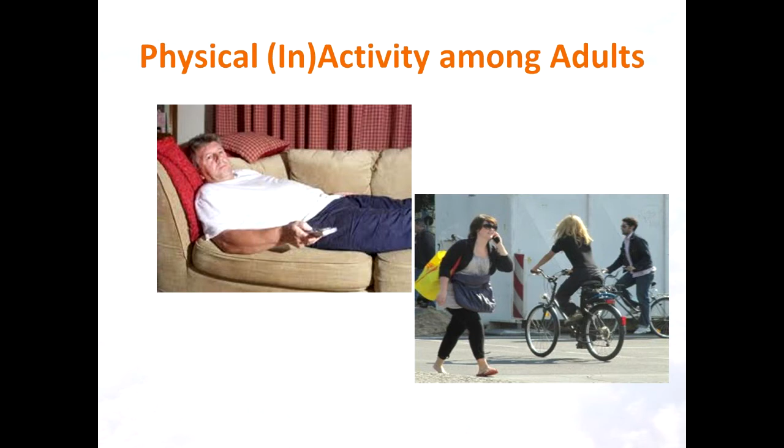We know that being physically active has many health benefits: it prevents obesity and other chronic diseases, relieves stress, and has a positive impact on mood. But we also know that sitting or lying around too much is dangerous to our health. Research shows that even when adults do reach the minimum level of physical activity each day, if they also sit around too much, they are still at risk for obesity and other health problems. In other words, it's not enough just to be active enough—you cannot cancel out the dangers of sedentary behavior just by walking or biking enough. In the public health world, more attention is being paid to the dangers of being sedentary as well as the importance of increasing physical activity among the population.

Sadly, driving is one of the all too common, and quite difficult to avoid, forms of sedentary behavior. This study looked at how the more miles a person drives, the more likely they are to be obese. In the lowest quartile of miles driven, only 9.5% were obese. In the highest quartile, 27.08% were likely to be obese.

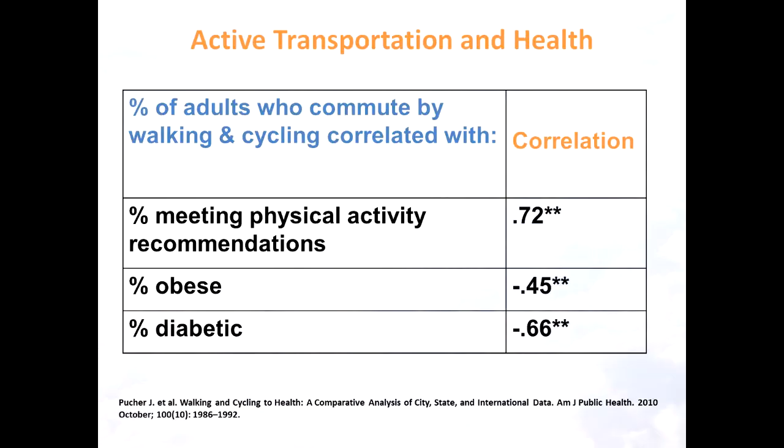This study compared all 50 states in the U.S. and found that higher rates of walking and cycling to work were associated with a higher percentage of adults who achieved the recommended levels of physical activity, a lower percentage of adults with obesity, and also a lower percentage of adults with diabetes. The data you see here is an average of the correlations found for all 50 states. You can go ahead and skip this one.

So for children and youth, same with adults, not enough kids across the nation are being active enough. Also, there's a very high level of kids just being sedentary, watching too much television, spending too much time playing video games. We will be having a research review coming out from our program, hopefully within the next week or so, looking at sedentary behavior among youth and the dangers of that and different ways that we can lower sedentary time.

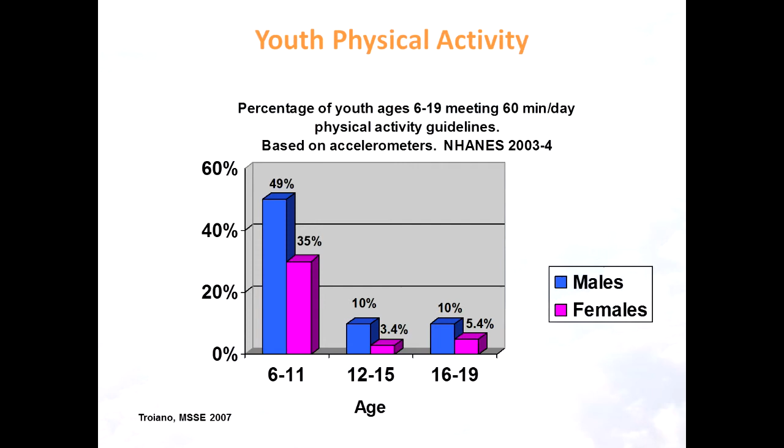This shows that across the country, the percentage of youth who are meeting the 60 minutes a day of recommended physical activity is quite low. It's the lowest in the middle age group of 12 to 15-year-olds. And we know that as children get older and reach adulthood, their physical activity levels continue to decline. So it's a challenge that just continues to be more of a challenge as people get older, that they are not getting enough physical activity.

This is all evidence-based. We know being active is good for body and mind. There's the physical benefits, there's mental and cognitive benefits. And one of the things that we here at ALR, Active Living Research, focus a lot on is the message that being physically active among children is good for their academic performance.

We know that in schools, it's much less likely now that kids are able to walk or bike to school. The rates of walking and biking to school have dramatically declined since the 1970s, and that's due to a number of reasons, whether it's fear of strangers, fear of other dangers that may or may not be based in reality. There's also just the physical environment that has changed. But the opportunities to make the environments better, to make them more walkable and bikeable for kids are there.

There's also opportunities in the school for better PE, more time for recess. And the argument that we like to make is that being active and being fit has been demonstrated in many studies to be very good for mental focus, for cognition, for school behavior, for school performance.

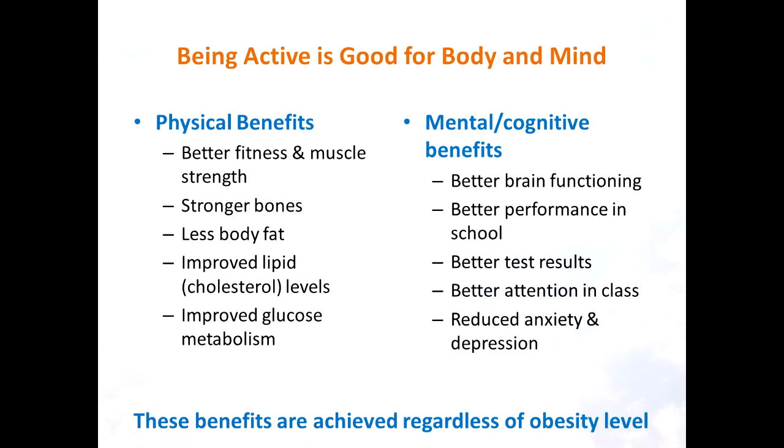Here we see that in a Danish study, adolescents who walked or biked to school were less likely to be overweight than those who drove to school or who were driven to school.

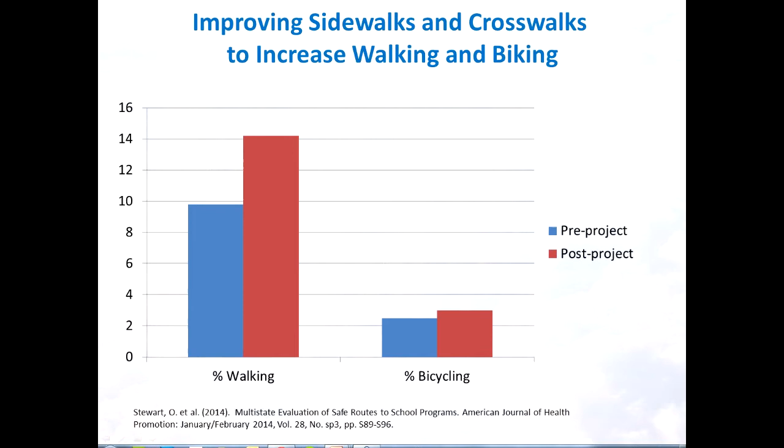This is a newly published study in the current issue of the American Journal of Health Promotion. It evaluated the impacts of safe routes to school projects in 5 states: Florida, Mississippi, Texas, Washington, and Wisconsin. And it found that walking and biking to school increased by 37% when sidewalks and crosswalks were improved. The importance of this study is that it's the first large-scale study to show that physical improvements to pedestrian environments, rather than just programs or educational campaigns to encourage walking, can actually result in higher levels of walking.

And those changes have worked. I think the rate of cycling went up 262%, the annual bicycle counts between 2000 and 2010 went up by 262%. So dramatic changes happening in New York City, and a lot of this has been led by the efforts of an agency called the Center for Active Design. You can check them out. There's a new nonprofit called the Center for Active Design that is consolidating the work and continuing the work that the City of New York has done to improve their environments for pedestrians and bikes.

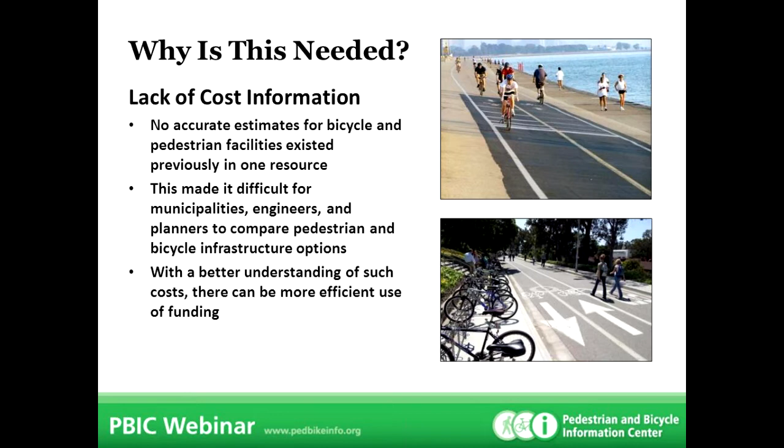Finally, we figured this resource is valuable in that when agencies are considering adding pedestrian bike facilities, they need this piece of information on the cost to combine with expected effectiveness or benefits of the improvements, and the benefit cost ratios for estimating purposes and allocating resources.

So where do these costs come from? Well, our team set out and really looked in a variety of places. One of the most useful sources, of course, was the internet, going to different state DOT websites.

We didn't just believe anything that was on the internet, because you can get a lot of misinformation. But we did go directly to primarily state DOT websites, where they would publish the costs they were experiencing for different treatment types. We were able to get information from about 40 states.

There was also another resource called Bid Express, a transportation bidding website, and we were able to interact with the folks that run that website, and they gave us written permission to use certain information from the website as it pertained to pedestrian bike treatments.

And then we also targeted certain searches of publications and reports from recognized journals or other sources that might be useful as well. So for each of the different costs, we would capture information like the type of facility, the description, what kind of road it was on or what kind of conditions, the total cost and the unit cost, for example, cost per square foot or cost per treatment, the sample size, how many of these treatments were installed.

If it was 100 miles of road, that would certainly have generally a lower cost per mile than if it were just 1 or 2 miles. So the number of treatments, it was 50 different pedestrian signals. The cost per signal was generally less than if it were only 3 or 4 that were installed. So we did capture the sample size used to generate the cost.

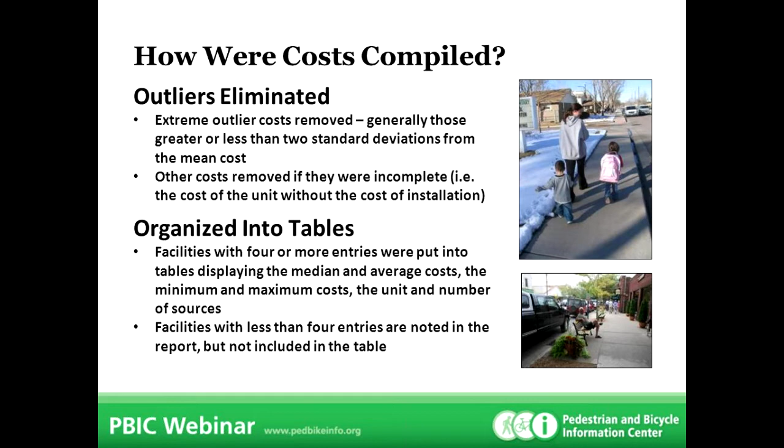We also eliminated costs if they were incomplete - for example, they did not include all of the different elements involved. And then we took the costs after we did sort of a filtering and screening, as I described, and put them into a series of tables. We're going to go through some of these tables and talk about the different information contained there.

And finally, just to let you know that what we're going to present in the report itself, it's represented by about 1,700 total cost estimates that we recorded, relating to about 73 different types of pedestrian bike facilities or infrastructure, and these are summarized in tables. And again, they came from 40 different state DOT websites. 5 of those 40 states, by the way, had more than 100 entries each: Ohio, California, Minnesota, Massachusetts, Wisconsin.

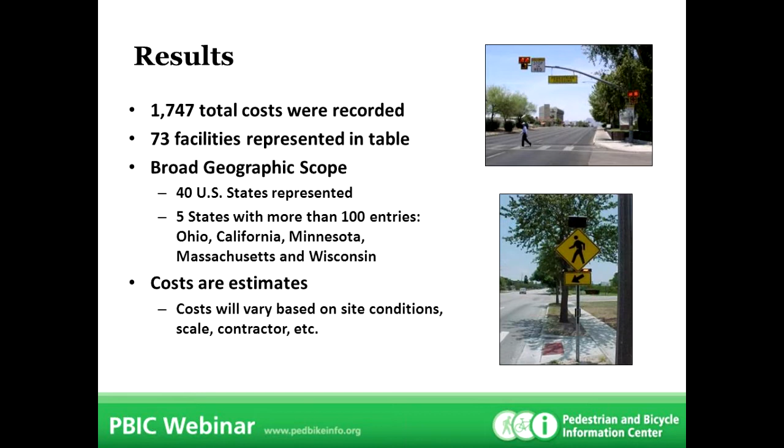And the costs for a given treatment do vary considerably by site conditions, by the number of treatments, by the contractor, by the labor cost, materials costs, all kinds of other factors that we realize there are some normal variations. Okay, next slide.

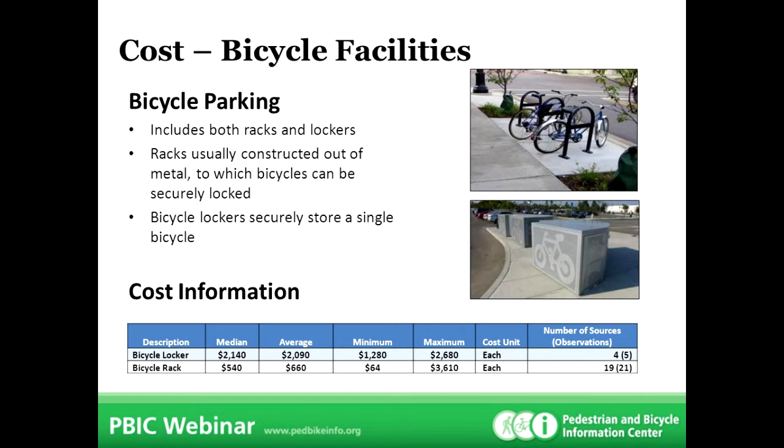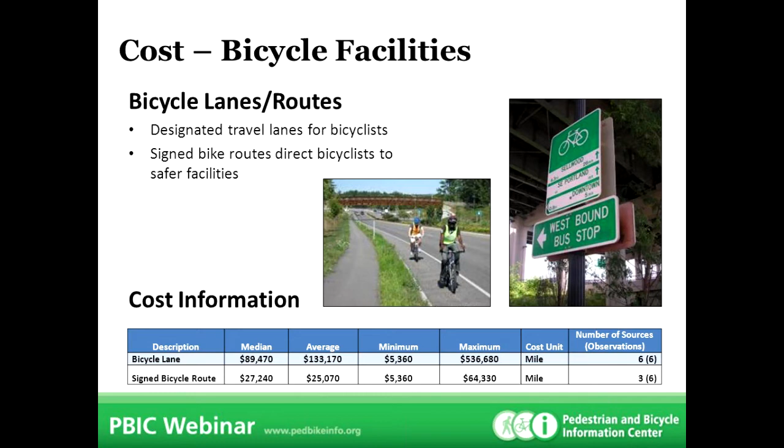For the next bicycle facility, we found the cost for bike lanes or signed routes. Bicycle lanes, shown in the picture on the left, are typically assumed to be 5 feet in width, and the cost unit was by mile. The average cost for a bike lane is around $133,000. Signed bike routes, shown on the right, help direct bicyclists to safer facilities, and the average cost for that per mile is around $25,000.

Next we have some traffic calming measures you can install. The first is a chicane, which is a concrete island that helps offset traffic and slows vehicle speed by creating a horizontal diversion. These can either be made out of concrete or landscaped, as shown in the pictures. The cost for these was around $10,000 on average.

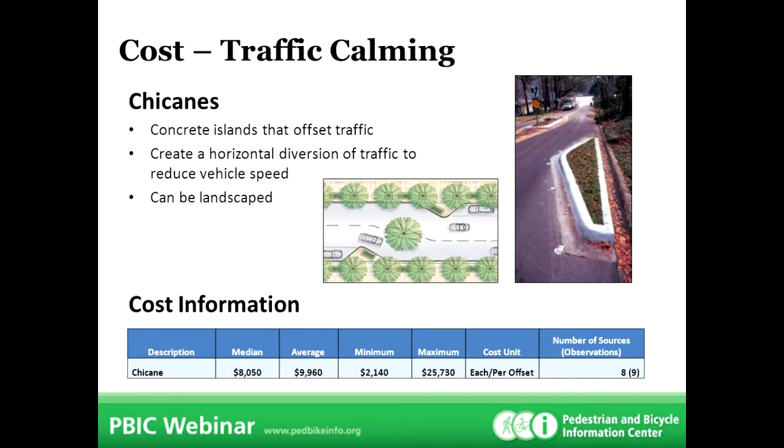Another traffic calming measure is curb extensions, also known as chokers or bulb outs. These extend the sidewalk or curb line out into a parking lane, creating a pinch point in the road that helps pedestrians cross the street. They can be done by bringing both curbs in, as shown above, or by dramatically widening one side at a location. These can also be used at intersections to create a gateway effect. The cost for these was around $13,000 per curb extension.

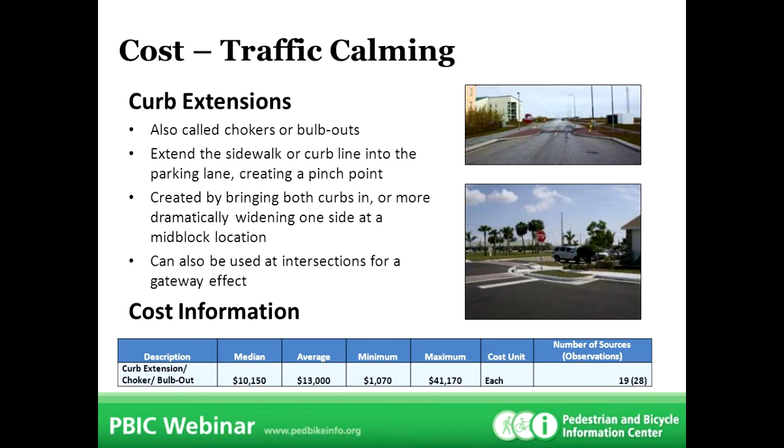Next we found the cost for diverters. These are islands at an intersection that help prevent certain through or turning movements by cars. They can be placed across both lanes of traffic, known as a full diverter, or just across one lane as a semi-diverter. You can see on the slide the different types available, from diagonal to star, forced turn, and truncated. We weren't able to separate the cost by those specific types, but we did separate it by full diverter cost, around $26,000 on average, or partial/semi-diverter, around $15,000.

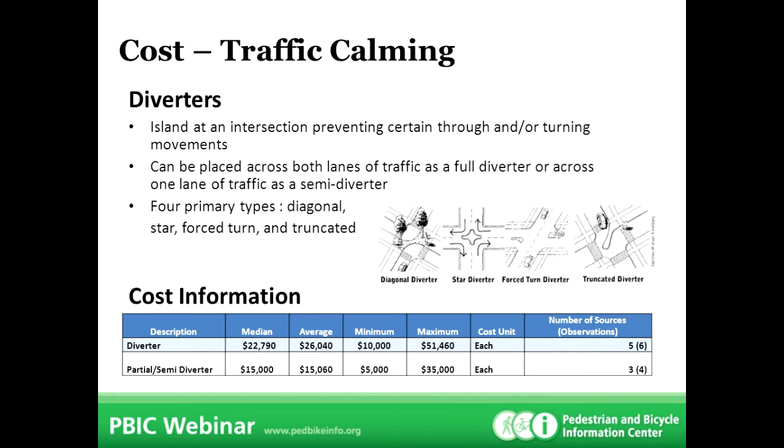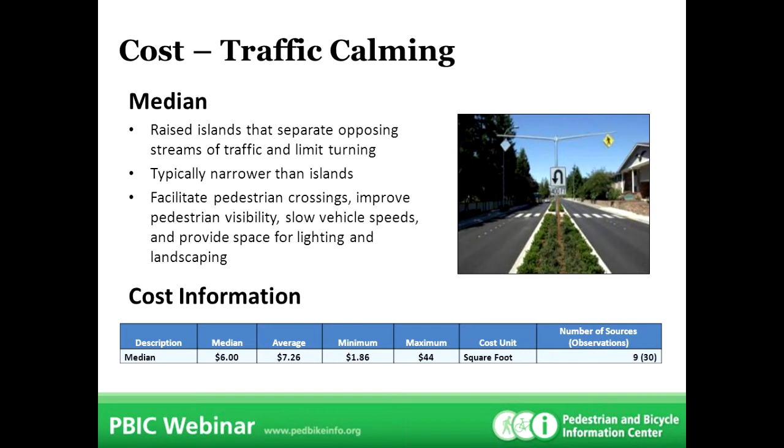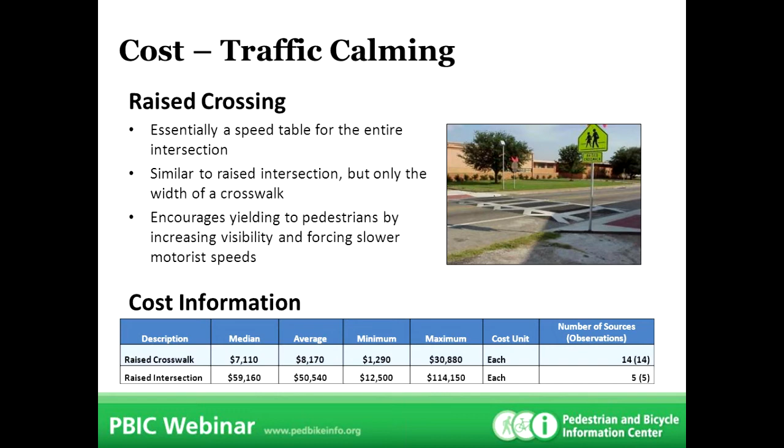We also found costs for roundabouts and traffic circles. As many of you have probably seen, these can range from very small mini circles in a neighborhood to large roundabouts with multiple lanes of traffic. Unfortunately, the costs that we found weren't really detailed enough to differentiate between the two. But essentially, these intersections are designed to eliminate left turns by requiring traffic to exit to the right of the circle.

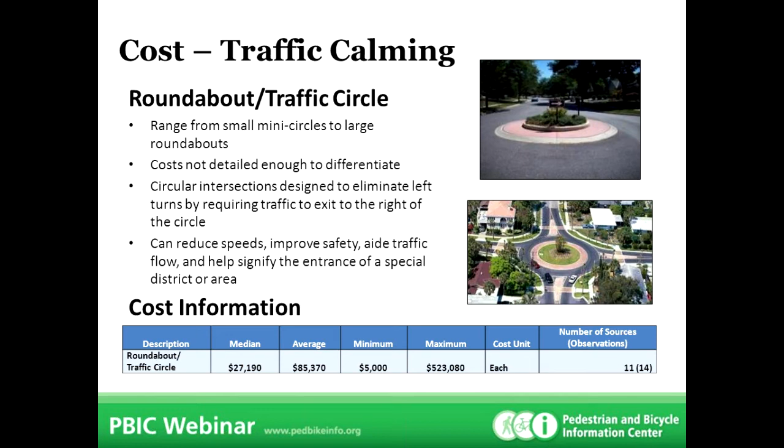The benefits for these is they can help reduce speed and also improve safety. They can help aid traffic flow. And they can also be used as sort of a gateway to the entrance of a special district or area. The average cost here was around $85,000, but the median cost was $27,000. From the minimum and maximums, there was a wide range of costs based on the size, the site conditions, things like that.

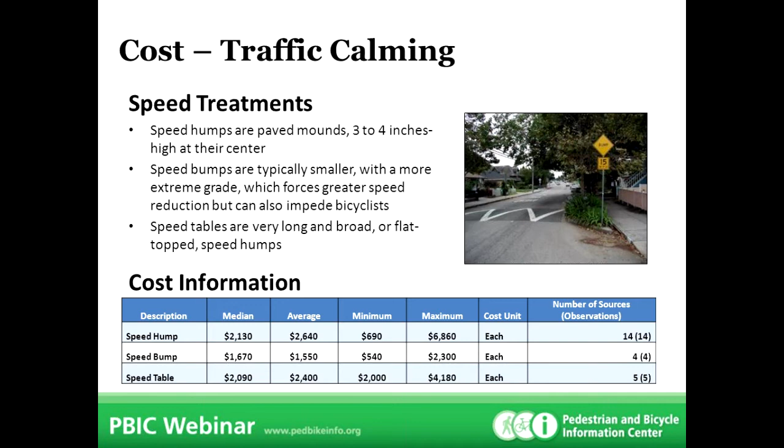Next, we'll move to looking at some pedestrian accommodations. The first one we have is for a curb ramp. This helps those who are using the sidewalk to get to the roadway, for people in wheelchairs or people that have strollers or other mobility impairments. Truncated domes or detectable warning surfaces provide a distinctive surface pattern through the bumps that you can feel under your feet. These domes help to warn visually impaired people of an approaching street, and they are actually required for ADA compliance.

As you can see in the cost information, a truncated dome or detectable warning is around $42 a square foot. And then wheelchair ramps, we actually found costs both for the total ramp, which is around $800, or per square foot, which is around $12 per square foot.

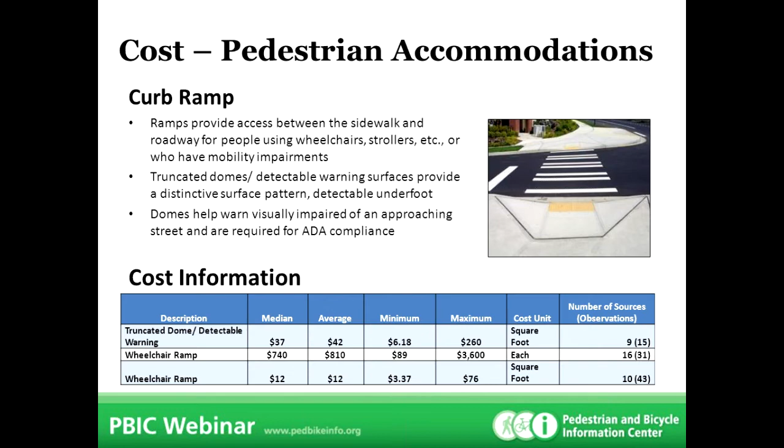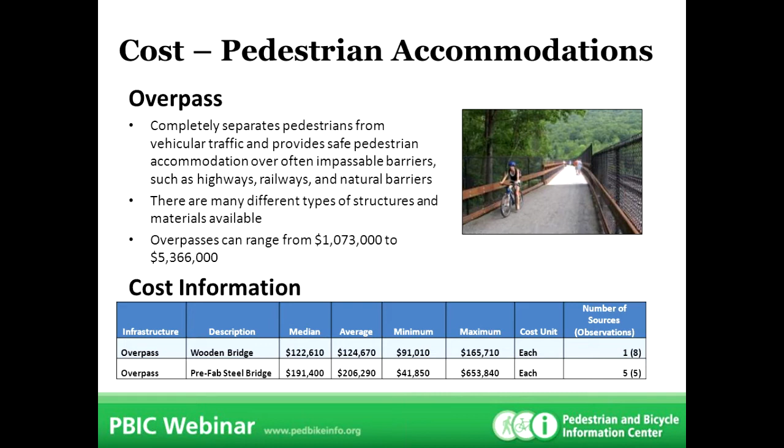Another accommodation for pedestrians and bikes is overpasses. The costs that you see in the cost information are only for bridges - those were the ones that we could find more than 4 observations for. For the wooden bridge, we have an average cost of around $125,000, and the prefab steel bridge is around $200,000. But this was one of those countermeasures where there were multiple different types of structures and materials available. Combining all those costs, we found that overpasses can usually range from around $1 million up to $5.3 million. So it's a wide range of costs and significantly higher than just the bridge cost we have below - that's something to keep in mind.

Similar to the last slide, we have fences and gates. These can help separate pedestrians and cyclists from interactions with the road, and also keep them separated from railroad tracks. They can be used in the construction of bike paths or pedestrian paths, and then also on overpasses and bridges. On average, the cost of a fence per linear foot was $130, while the cost of a gate was around $910 each. These costs are another item we found that ranged dramatically based on the type of material used for the fence or gate.

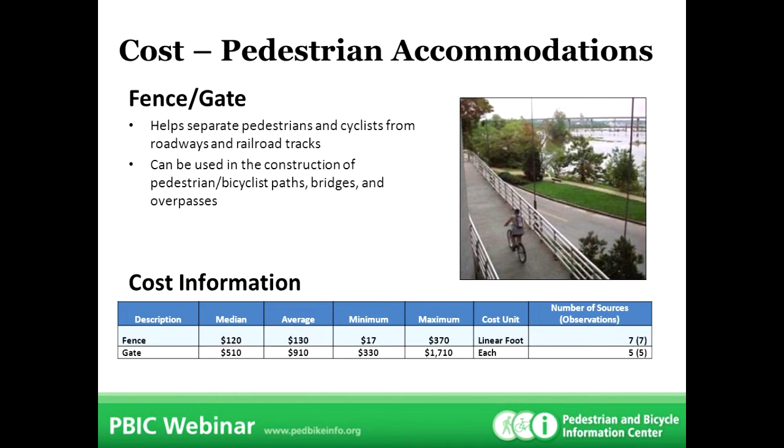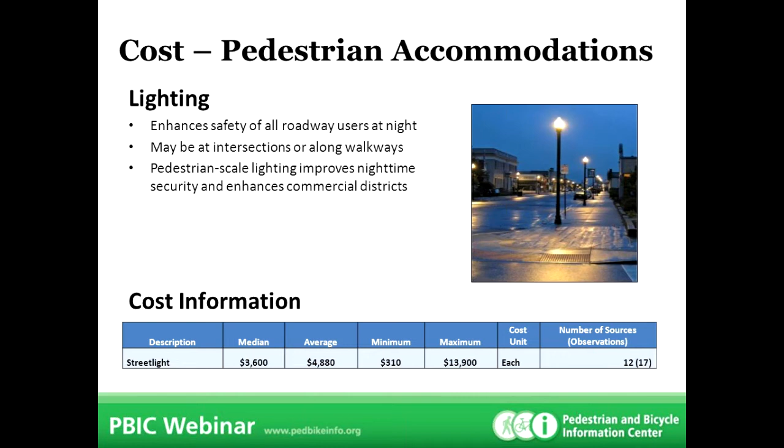For pedestrian scale lighting, this is something that can really enhance the safety of not only pedestrians, but all roadway users at night. They can be used on both intersections or along walkways, especially walkways along commercial districts, which can really enhance that at night. It also helps with improving nighttime security. We found that the average cost of each of these lights was around $5,000 per unit.

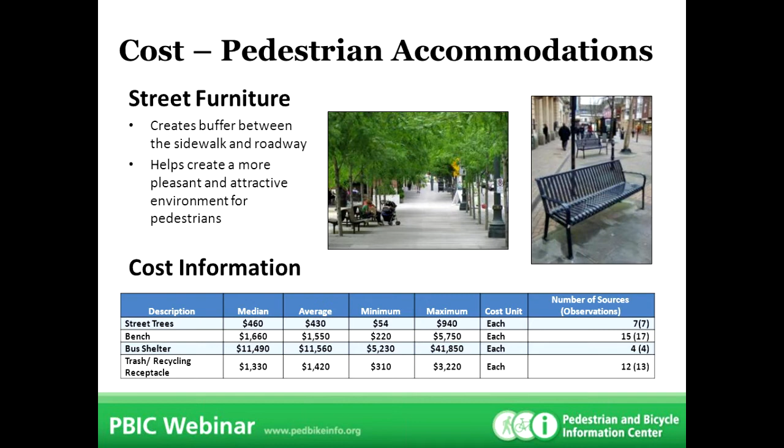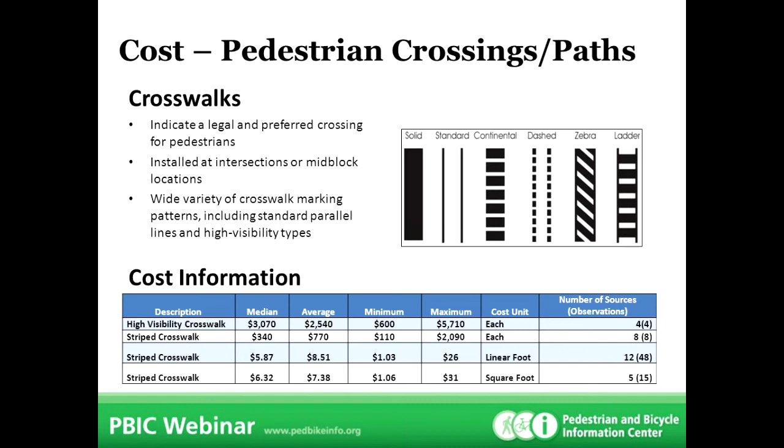Sidewalks was probably our most successful cost that we found. There's a lot of information on sidewalks because it is the most basic pedestrian facility. But there was a lot of difference in terms of the material we found the cost for, and in some cases it may or may not include curb and gutter. If it didn't say, we just included it as the concrete sidewalk cost.

You can see below that the cost for an asphalt sidewalk or a paved shoulder - the asphalt sidewalk is $35, where the shoulder is $5.56. A brick sidewalk will be more, at $60. A concrete paved shoulder is around $6.64 per square foot, and the concrete sidewalk is $32 per linear foot. On these costs, we assumed that sidewalks were 5 feet in width if it didn't say otherwise.

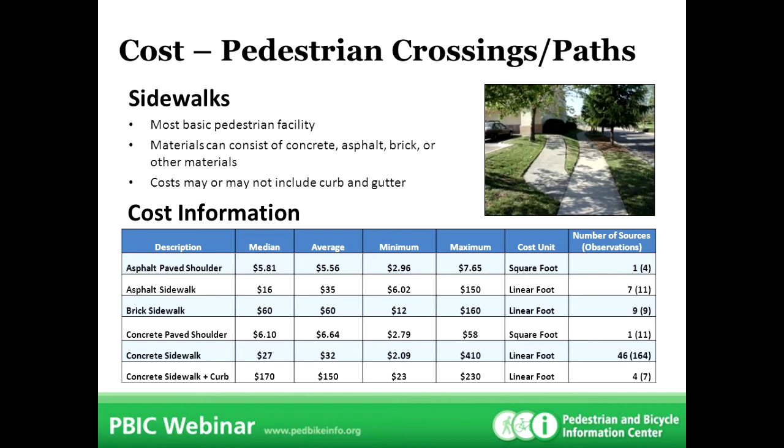Looking at pedestrian crossings for the paths - these are multi-use paths that can help create a safe environment for both pedestrians and bicyclists, and they help create mobility options away from the roadway for automobile users. We assumed these are 8 feet wide, and we found costs for both paved and unpaved trails. A boardwalk ran around $2.2 million, while a paved multi-use trail was around $480,000 per mile, and the unpaved trail was around $121,000 per mile.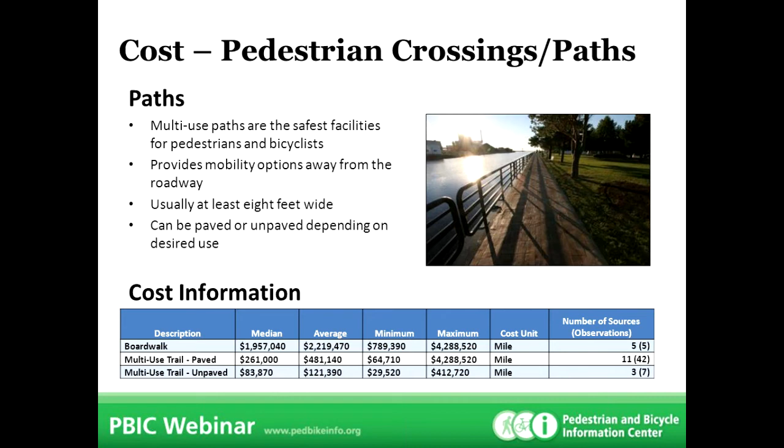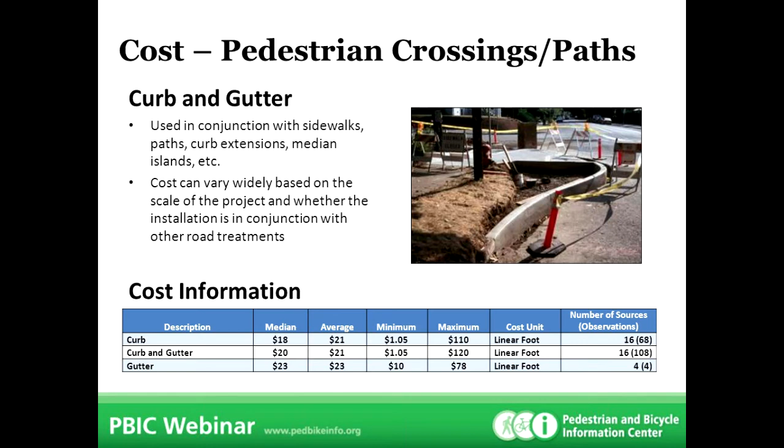Okay, so I'm going to just pick up - you all get the gist of what we're doing. I'll make another comment that some of the cost variations, as you look at these tables, there's quite a range sometimes between the minimum and maximum, and sometimes the range also varies by whether the projects are put in by contract - a contractor comes in and is paid to do that with their overhead rates and all their costs - versus whether it's done in-house. While we do capture the costs for both, obviously if the projects are done in-house, it's often much less cost-wise, especially for labor, etc., than if it's contracted out.

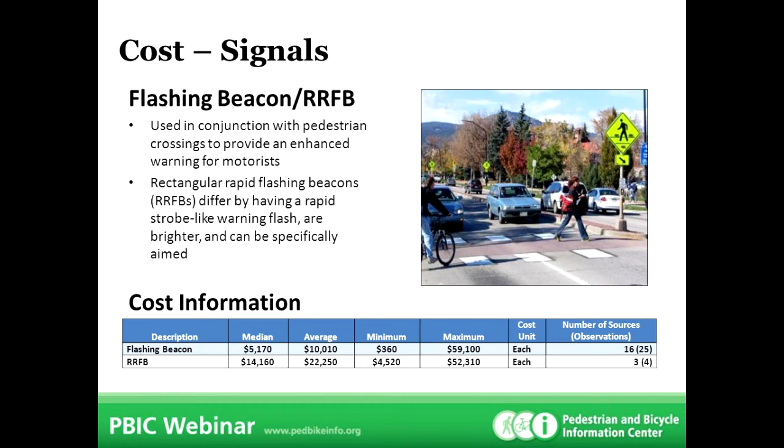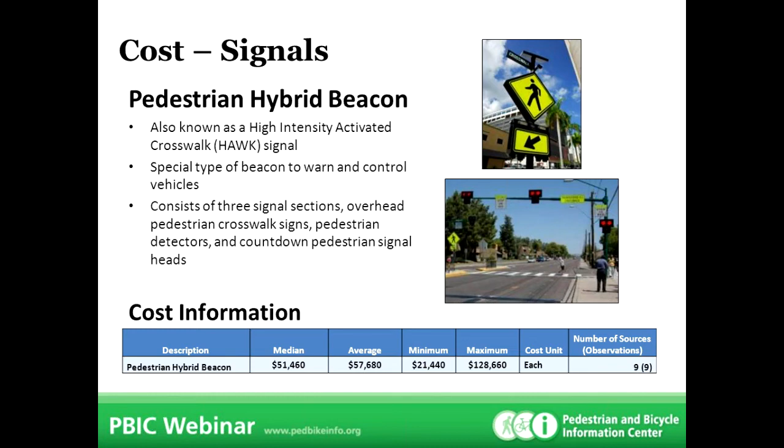The average cost we found is about $57,000. The maximum is about $128,000. These are often done in cities like Phoenix and Tucson, Arizona, and some other places around the country. By the way, they're allowed in the 2009 Manual on Uniform Traffic Control Devices.

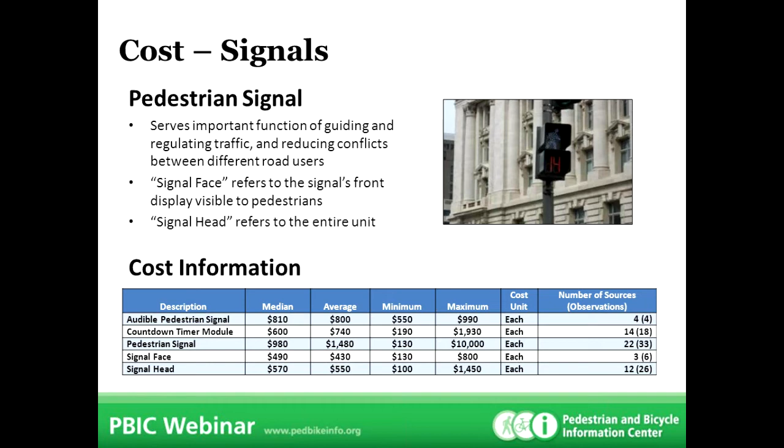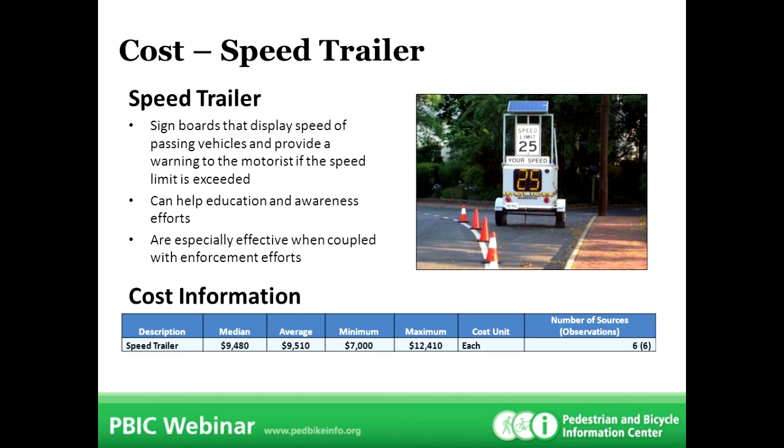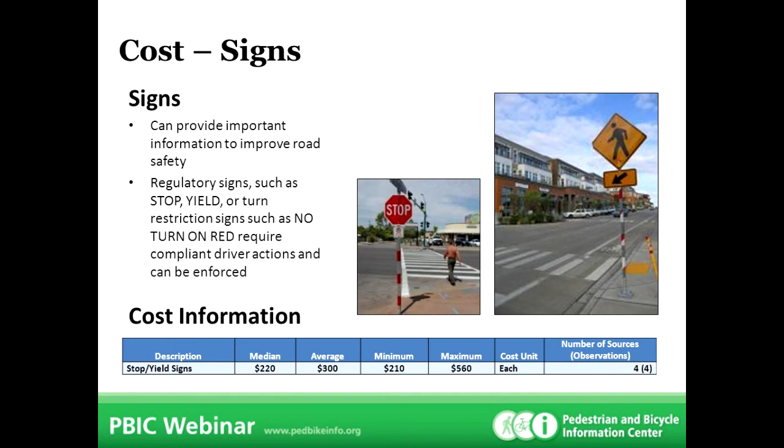Signs, just either the guide signs, warning signs, regulatory signs, cost on average about $300. That does include installation costs. Obviously a little less if you install a large number of signs versus just going out to install 1 or 2 signs.

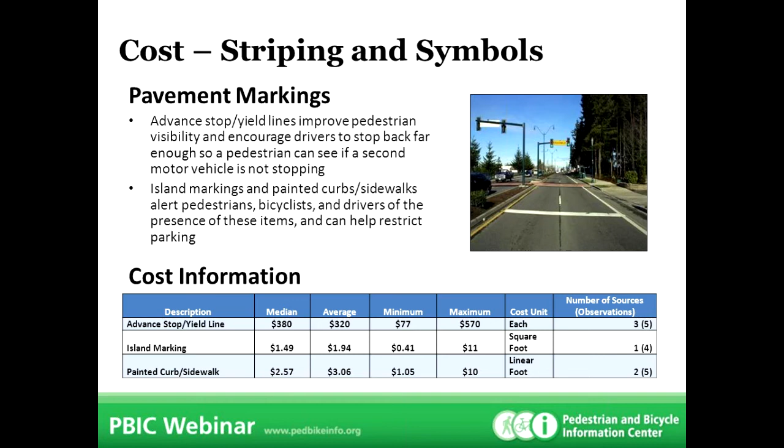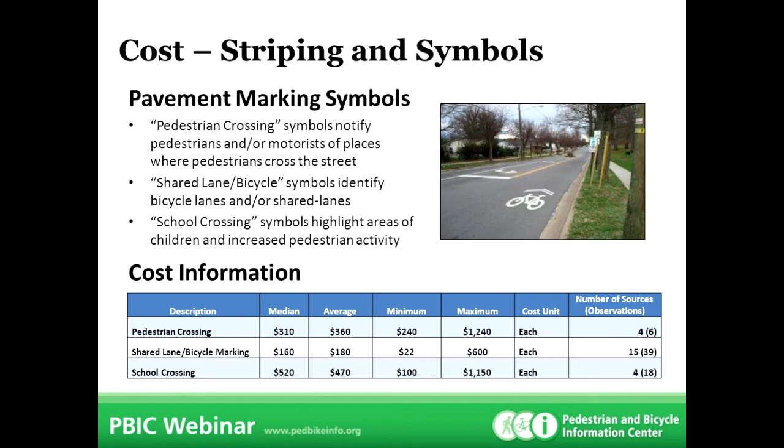So you get the idea. Here we've gone through most of the 73, and there's some others in there. But essentially, these are to be used only as estimates. These are not absolute costs. Conditions vary. They're mainly intended to be used for planning purposes. If an agency is going to install a given treatment at a given site, you do need to use your local conditions and your local cost estimating folks to take into account labor costs and local materials costs, etc., or right-of-way costs need to be added in, things like that. So these are only intended to be used as estimates, but they are intended to be used as a starting point.

So that maybe there can be some consistency starting to be used from state to state, adding adjustments as needed, and it can help decision makers make choices on a more cost-effective basis, especially if there are 2 or more different infrastructure treatments being considered, or if you're considering making improvements at multiple sites, and which ones are the most cost-effective. You can take into account the estimated cost as well as the expected benefit. Again, the ultimate goal is to encourage our public officials to construct facilities for better and safer and more walking and bicycling.

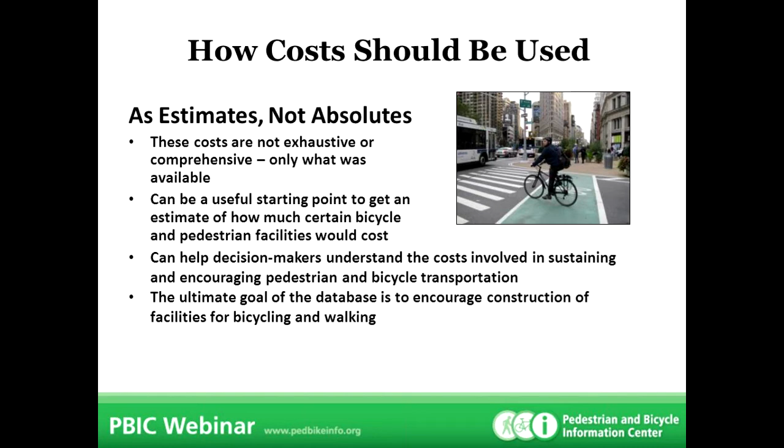So what were the lessons learned from this exercise, from this process? We not only generated costs for over 70 infrastructure facilities for walking and biking, but we know that there are some types of facilities we were not able to find sufficient costs to include in our report. So obviously this isn't the final version that will ever be done. It needs to be updated on a regular basis. We need to add costs for some other facilities, maybe some newer facilities, and we need to continue to explore the factors that do result in cost variations.

Okay, next steps. So what we plan to do next is, now that we have this published document on our website, we do have an inflation factor that we plan to apply to the different cost factors every year, so we can at least keep them updated in that respect.

But ideally, it would be nice in the future if we could add some of the treatments, additional infrastructure, new cost information, maybe even from a few other states or from some city websites.

We also plan to take this resource and include it. So we have two things: we have not only the published document, we also have the more than 1,000 actual cost numbers by state, by type of facility, by roadway type. That's in a database now.